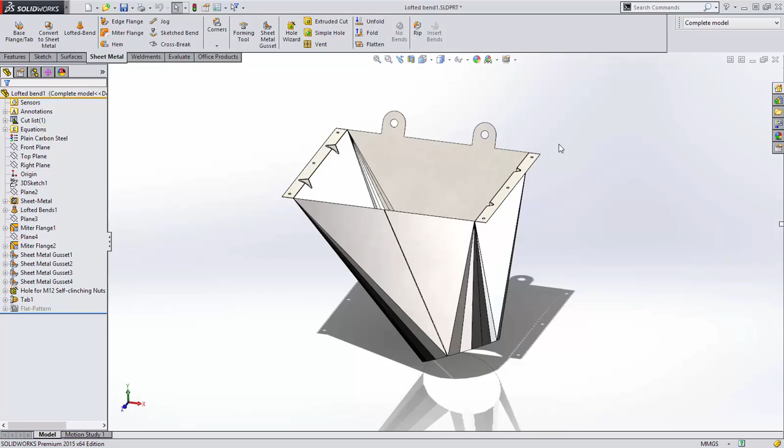In SolidWorks 2014, we introduced a new lofted bend method that created real bends as opposed to the approximated bends that were created using the formed method. But this new capability was limited to lofted bends with parallel sketch planes. But a hopper like this often requires non-parallel sketch planes.

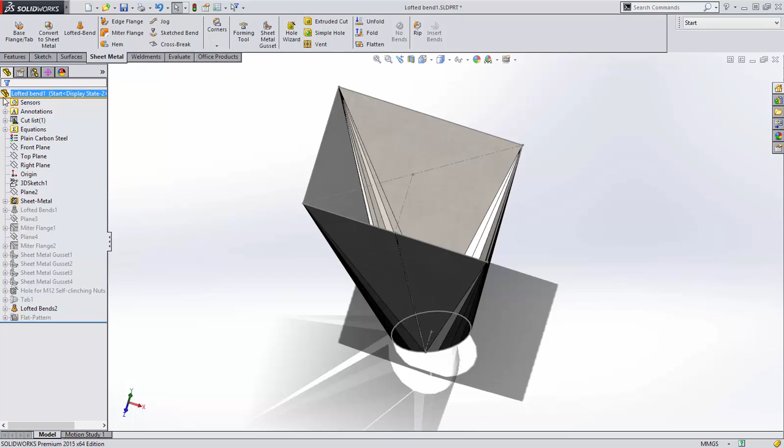Now in SolidWorks 2015, this parallel requirement has been removed. Accurate bend information can now be created, and of course the model can be flattened for fabrication. Let's jump ahead in the design of this hopper.

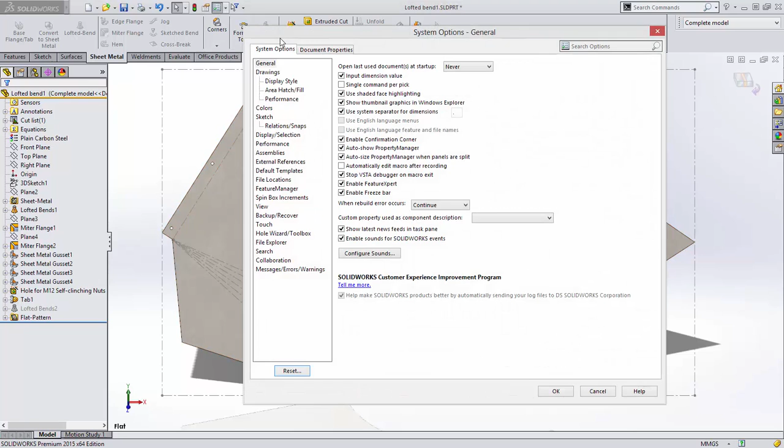Notice that this part has some gussets to stiffen the flanges. These gussets are created after the flanges are bent, but users still want to see their position in the flattened state as well. Two new options have been added to show the profile and the center of the gussets in the flattened state.

When creating sketch bends, there's now a preview of the bend during creation. This makes it much easier to be sure of the direction of the bend and the bend angle.

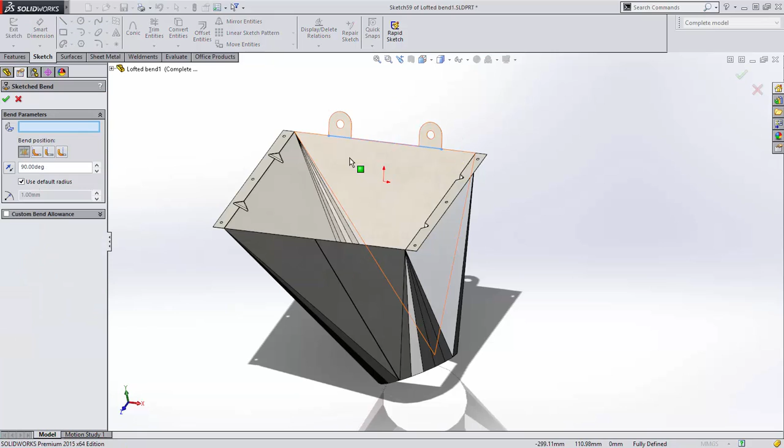Sheet metal parts often require the use of PEM fasteners, but looking up the proper hole sizes can be time-consuming. The Hole Wizard in SolidWorks 2015 now supports PEM standards for sizing the holes corresponding to the fasteners.

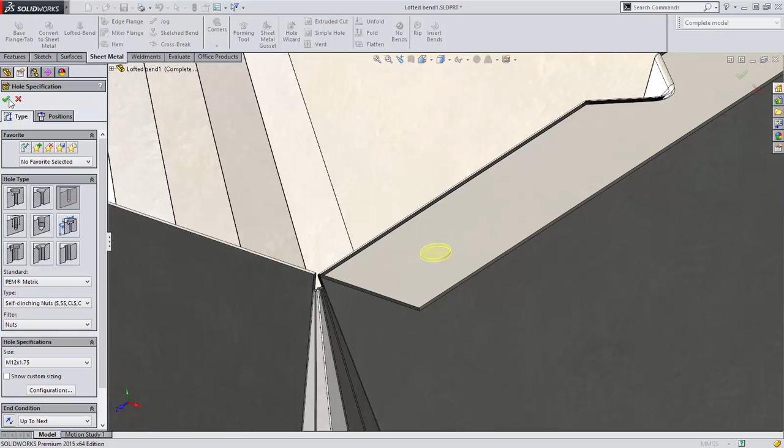Choose the standard, filter by fastener, and then by type. Select the size and you have a properly sized hole for a PEM fastener without having to look it up in the catalog. A real time saver.

Finally, when creating mirrored versions of sheet metal parts, it's now possible to transfer the sheet metal and flat pattern information from the original part to the mirrored part.

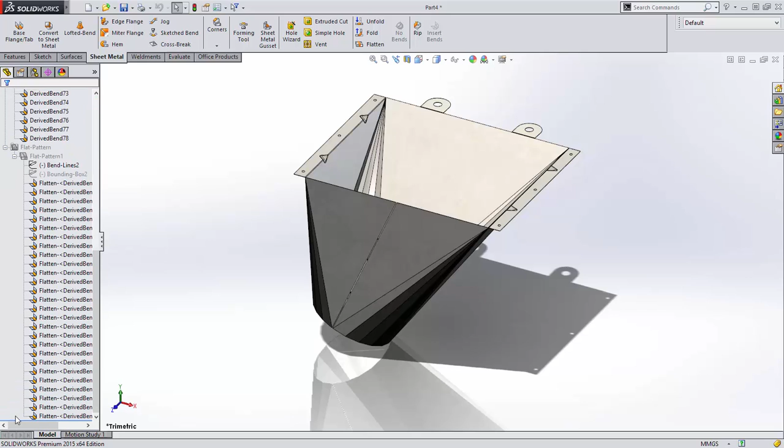This information includes flat pattern geometry, fixed face, grain direction, faces to exclude, bend lines and bend parameters, sketch transformations, and forming tool information. All this information is critical when documenting the mirrored part on a drawing.